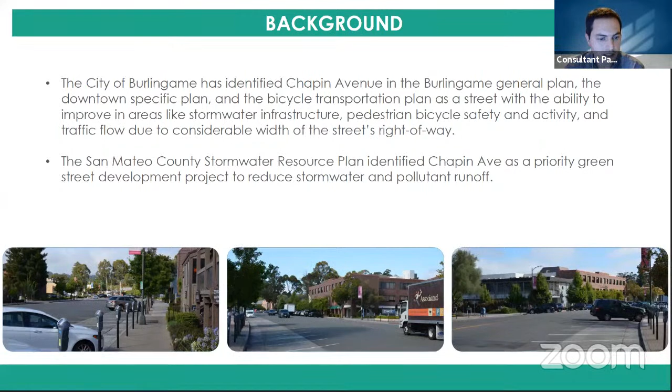After this meeting, we'll follow up with another presentation with City Council before finalizing our feasibility study with a hopefully supported alternative. Next slide, please.

So our goal for this meeting is to update you on the progress of the project since the last time we presented, as well as getting your feedback on the alternatives that we've developed since then. The key topics that have been a common theme throughout the public outreach stages of the project are green infrastructure, community spaces and village character, pedestrian access and safety, vehicular access and parking, and bicycle access and safety.

Next slide, please. So here's a bird's eye view of alternative 1. It features a planted median with street trees, bulb outs for bioretention and pedestrian crossings, a mid-block pedestrian crossing, class 3 shared bike lanes, an optional all-way stop at Primrose, and 78 total parking stalls.

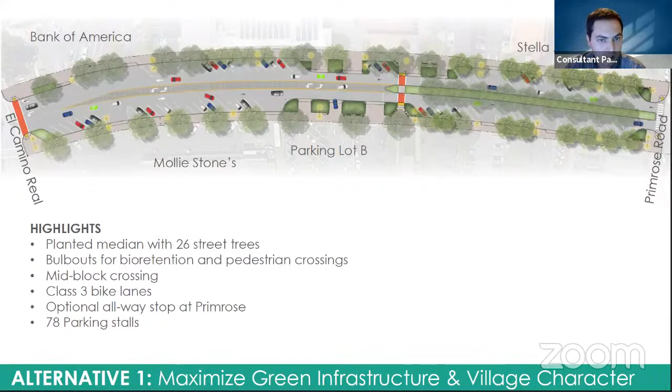And then we'll be able to get back to these bird's eye views later, so we can take a closer look. Okay, this is alternative 2, bird's eye view. It features a lot of the same things: street trees, bulb outs for bioretention and pedestrian crossings, a mid-block crossing, class 3 bike lanes, an optional all-way stop at Primrose, and 89 total parking stalls. The big difference here, as you can see closer to Primrose, is the parking median with the street trees.

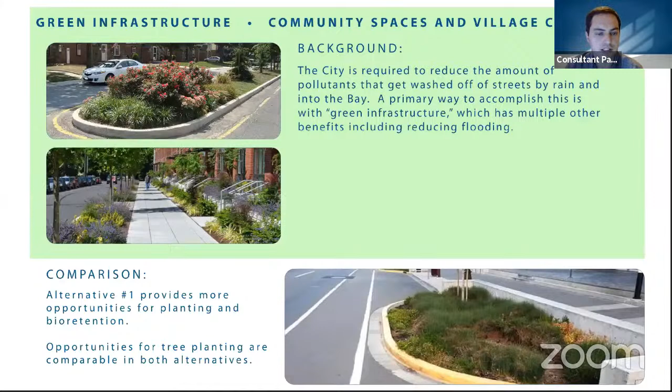Next slide, please. So one of the main goals of this project, regardless of the alternative that's chosen, is stormwater quality. By increasing the amount of landscaping and using green infrastructure like bioretention planters, we can help lessen the pollutants that wash off our streets and into the bay. Both alternatives provide added green spaces compared to the existing condition, but alternative 1 provides more total area. Tree plantings are also pretty comparable in both alternatives.

Next one, please. So here's a side-by-side comparison looking from the Primrose intersection. It shows the various aspects of the green infrastructure that I just talked about and community spaces that we've been discussing, and how they fit in with the street.

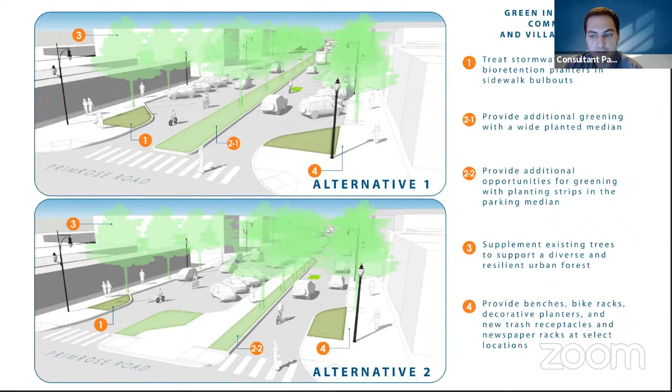Next one. Many of the residents that we discussed this project with envision Chapin as an extension of downtown, with a lot of potential for community spaces and pedestrian access. We also heard pretty often that pedestrian safety was a priority. So we included the bulb outs for pedestrian crossings, shortening them, including a mid-block crossing to limit jaywalking, and improved lighting to not only make pedestrians safer, but also make a better connection to Burlingame Avenue in character.

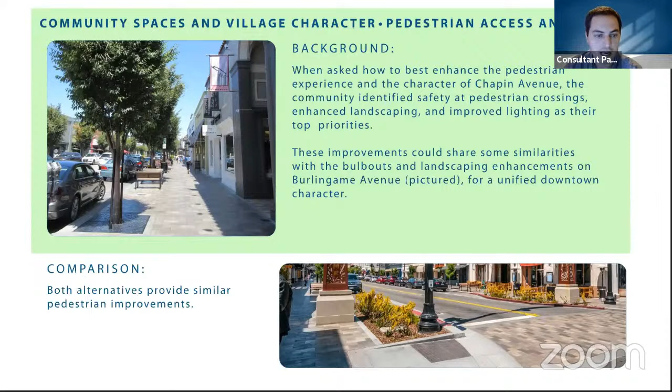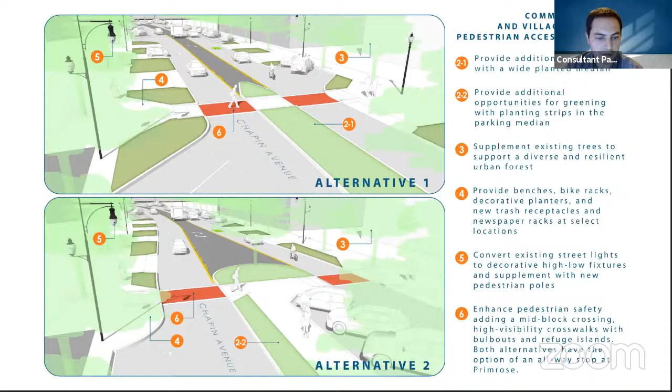Throughout our public outreach, parking has been probably the hottest topic that keeps coming up. Both options end up in a net loss of parking for reasons we'll show later, but alternative 2 aims to maximize the amount of parking we can get out of the street. We found most respondents were not using Chapin Avenue for biking, but because it's a dedicated bike route according to the city's plan, we're proposing to add class 3 bike lanes using sharrows on both alternatives.

Here's a side-by-side comparison from the opposite end, El Camino Real. We can see the nose-in angled parking, similar to what's there now, the shared bicycle route, and the center lane that will be used for turning movements as well as delivery loading for things like Molly Stones.

Now that we've gone over the individual aspects, we can take another look at the bird's eye view of each alternative and put those things together. We've got the shortened pedestrian crossings at the mid-block as well as at each intersection, increased green infrastructure with street trees as a common theme throughout with landscaping, and added community spaces.

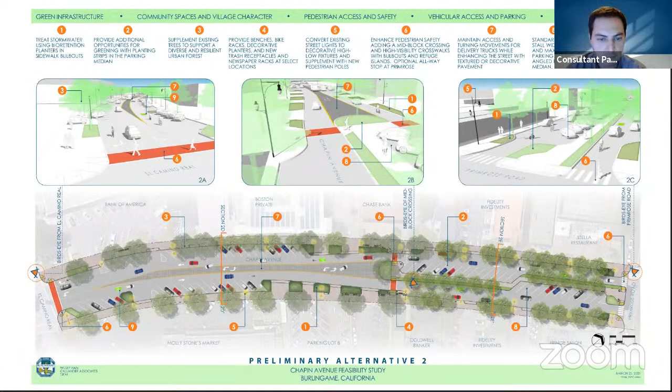Here you've got the cross sections again. I'd say the cross section at El Camino is identical, whereas to the right, closer to Primrose, you've got that parking median with pedestrian access, so you've got two sides of parking on the southbound lane of Chapin.

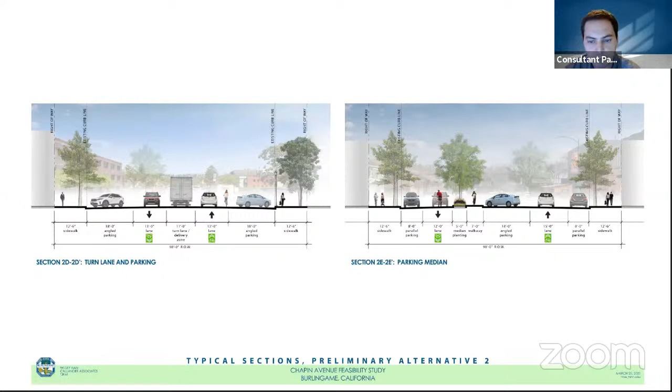Here you've got the parking impacts I was talking about earlier. The reason we're losing net parking counts in both alternatives is due to the non-standard orientations in the existing condition—you've got two different types of angled parking, which once we improve the street, we'll need to provide uniform stalls for. We're also trying to utilize some of the street width for other benefits like community spaces, medians, traffic calming measures, and green spaces.

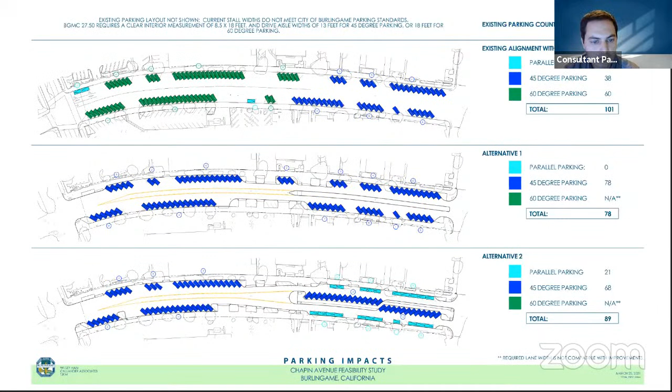Here we've got a similar comparison for green space. As you can see in the existing condition, the trees are more sparse and not necessarily themed or interconnected. In both proposed conditions, you've got the bioretention bulb-outs and the planted medians.

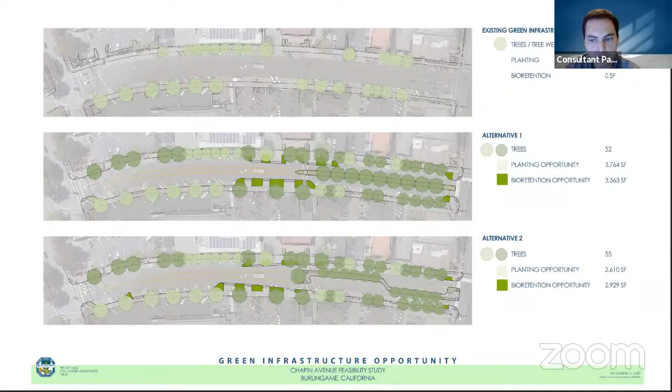Here we go with a summary table of what I've been discussing in the last two slides, comparing the existing conditions to both alternatives when it comes to parking as well as landscape areas.

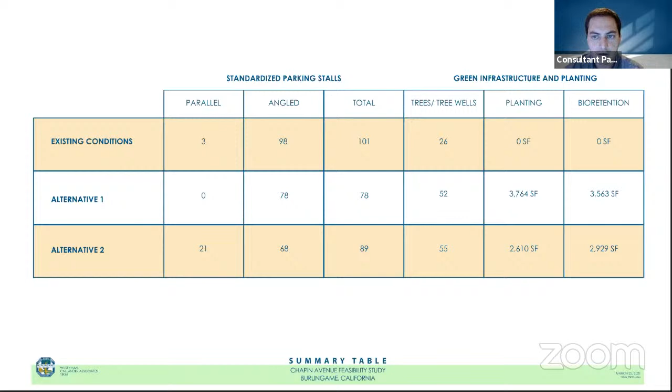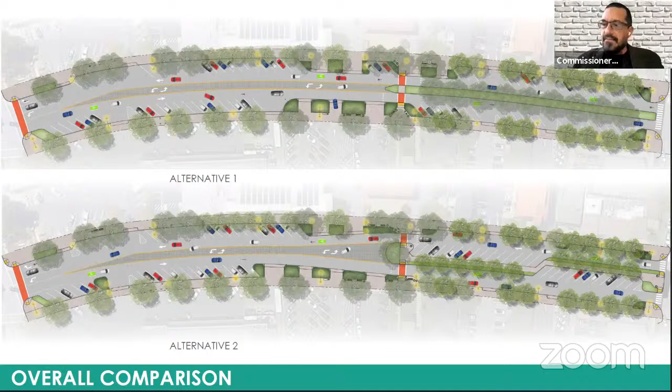Okay, great. Commissioner Lee, do you have any questions or comments? Yes, I do, thank you. How far is the crossing distance at El Camino and Chapin? How far do the pedestrians have to walk?

It looks like it's 4.5 lanes. Is that over 60 feet? That is 47-ish feet. Okay, I can live with that.

Thank you. My next question is on alternative 1. It appears that parked cars will be driving over the center mid-block crosswalk as they pull out. Is that correct, that they would be driving backward over the crosswalk? When they're backing up, yeah, currently they have probably just enough space to back up and not hit it. But you're right, that's something we'll have to look at when we get into actual design. It looks like both legs of the crosswalk would be invaded by drivers backing up onto the crosswalk in alternative 1.

Next question is over at Chapin and Primrose. Is that going to be a 3-way stop then? That's an option in both alternatives, yes, the option to add an all-way stop in each direction.

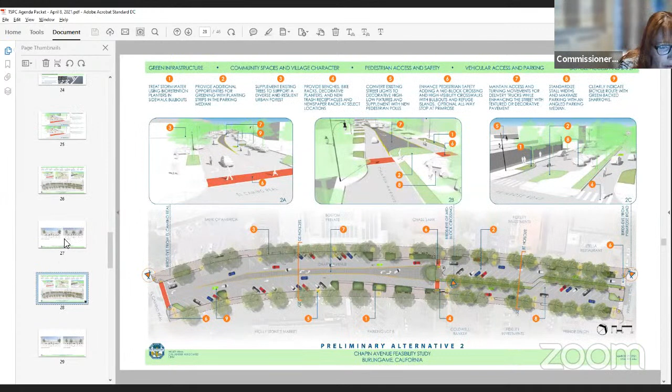All right, my last thing - I noticed when you showed the lighting, can we go back and show the street lights? I noticed that they were not in the position that is most helpful to the crosswalks. Can we go back to that slide possibly? Somewhere you showed street lights. Maybe it was like the street view. No, it was like the human scale view. Yeah, it'll be... all right, this one, there you go.

Yeah, so for example, I don't see a new street light here on the left side of the landing zone. And ditto on alternative 2. And then for pedestrians, that street light really ought to be way up there, closer to the crosswalk, so that pedestrians are lit up in the crosswalk at night. Same with alternative 2, just to take a lot more care of how the crosswalks are lit up.

And they need to focus the light on the front of the body of the pedestrian, not just overhead, because then the rest of you is dark. The body needs to be lit up. So for example, both alternatives, see the lower lamp on the right? Like you have the upper one for the motor vehicles, it appears - that lower one is the one that needs to be shining on the pedestrian's body, so you see their clothing lit up at night. And it's also far more comfortable for a pedestrian to have lower lighting. It's much cozier when you're walking at night to have down low lighting instead of up high.

So I would like more care on the lighting and where they are. I mean, this might have just been photoshopped in because it looks good, but there aren't lights, you know, like on that landing zone at El Camino. Clearly you need a street light there - I mean a pedestrian crossing light. Anyway, that's my questions. Would those be looked at more thoroughly, the lighting?

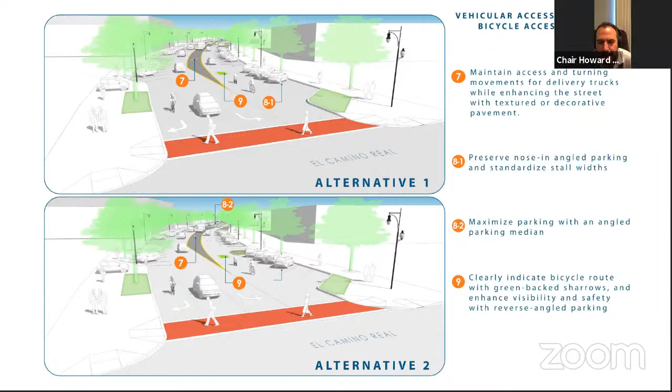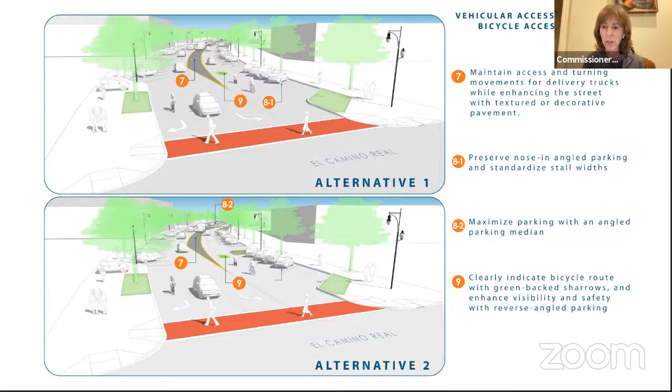I do. First of all, thank you for such a wonderful presentation. It's really made this easy to visualize both of these alternatives and compare them. I really appreciate the effort that went into this. I also would like to say that while I haven't given much thought to Chapin in the 13 years I've lived in Burlingame, it's because it's just so unremarkable and an open space. I think this is going to be a wonderful change and a great addition, especially because of the ecologic reasons.

Looking at the two designs, I have to agree with the general population. I definitely prefer alternative 1 for several reasons. One is, right now Chapin is kind of a wasteland, kind of ugly, kind of industrial. And the amount of green space, both planted and trees that you showed, is at least 20% more with alternative 1.

So not only is it data-driven with a larger amount of space, but also from a visual standpoint, having one big long block going down the second half of the street is a much more valuable way to have your green space than to have little slivers of it cutting around the different areas of the median and angled parking, in my opinion. Plus some of that then needs a sidewalk because people are exiting in the middle of the street, so that where we could only have pure green space in alternative 1, you need to take some of that away to have a sidewalk running that entire length in alternative 2.

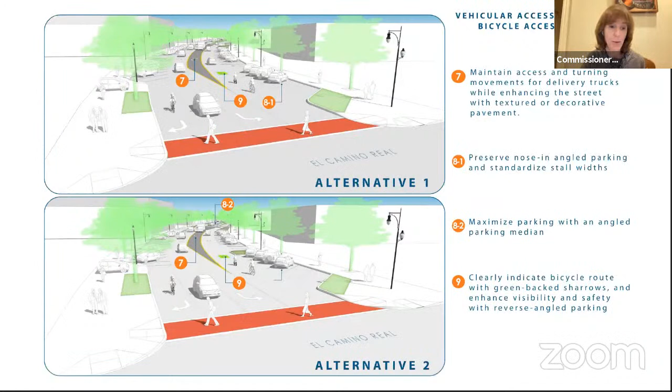But thank you, I'm excited about this project now. Great, thanks so much for your feedback.

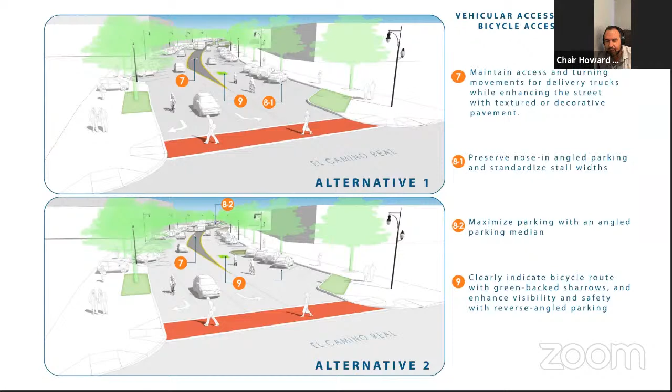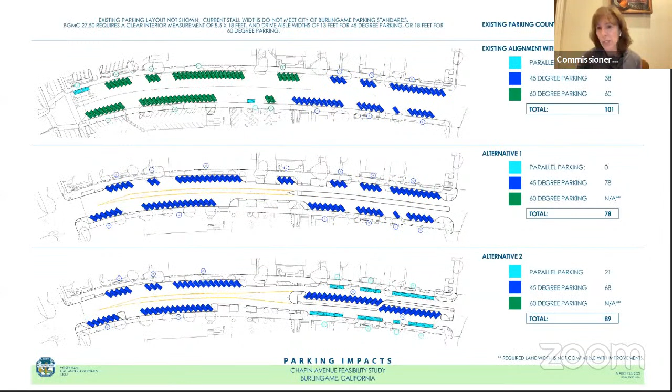Commissioner Israelit, I hate to jump in because I'm going to go to Commissioner Martos very soon, but you said something about sparing 11 or 12 parking spaces—I just want to clarify, alternative 1 actually takes out significantly more parking spaces than that, right? We lose 11 or 12 in alternative 2, but alternative 1 we lose, I think, 22, right? I was just comparing alternative 1 to alternative 2—there's a difference of 11 spots. We're going to lose parking spots with either, I'm just comparing 1 to 2. Got it, okay, I just wanted to clarify, make sure we were all on the same page on the numbers.

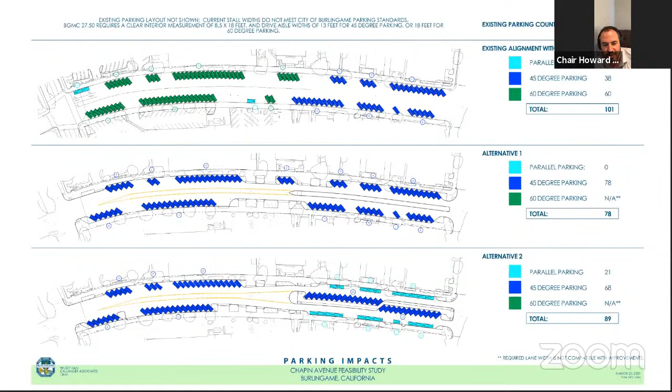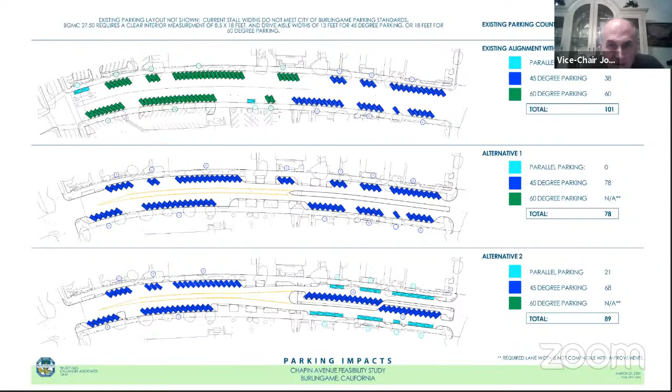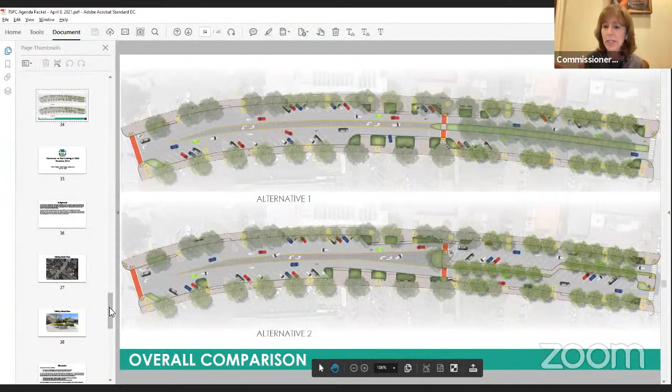I had some questions. So I was wondering about the median—can you go to the image that shows the merchants that will be affected by that median? Right now there's no median, and people can turn left into, let's see, I can't see the names of the merchants there. I think I saw Fidelity and maybe Coldwell Banker. Go to the next slide. I think there's two real estate agencies there. There was one of the slides that had the names of the merchants on it.

So I was wondering, there are going to be some merchants affected by no left turn because the median is there in both alternatives. I was wondering what their feedback was—you said you got feedback from the community as well as the merchants. Do you recall what their feedback was, if they had any concerns? Yeah, you're right, actually. We did do a presentation at DBID earlier in the process. I don't recall getting feedback specifically about what you're asking—a lot of their feedback was about parking specifically. Okay, so their bigger concern was with parking. Yes.

So I guess it doesn't matter who the merchants are if, as a group, they didn't have any concerns about the no left turn into their driveways. I was wondering how far, well, I guess how far doesn't matter, but I could see people traveling west wanting to get to a business on the east side, making a U-turn after the crosswalk. So will that be no U-turn there, or will U-turns be allowed at that point?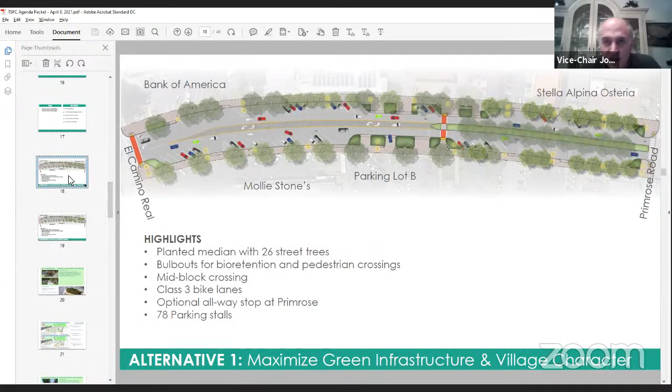So then can you flip the chart back to alternative 1? Okay, and then go back to alternative 2. That's what I thought. So what I would do if I'm traveling westbound on Chapin and I want to get to my Fidelity office on the south side of that street, is I would park in one of those stalls in the median, and then I would jaywalk right across the street to Fidelity.

Now, so that I'm not jaywalking, was it considered to possibly put another crosswalk mid-block where that zigzag is, so that someone can get to the other side safely in a crosswalk? Did the consultants, Mr. Parker, did you consider that?

We did not. I guess one thing I would add is the volume of driveways in that location may make it difficult to fit a crosswalk in, but we felt that the feedback was to put a mid-block crossing, so we put it at the mid-block, so that it might get used by more people in total.

I understand that, but I'm saying right at that zigzag is where the Fidelity office is, and I'm headed westbound on Chapin and I want to get to my Fidelity office. There's nowhere on that street for me to make a U-turn. So what I would do is park in one of those angled slots right at that zigzag, and I'd walk across the street. It'd be safer if I walked through a crosswalk across the street.

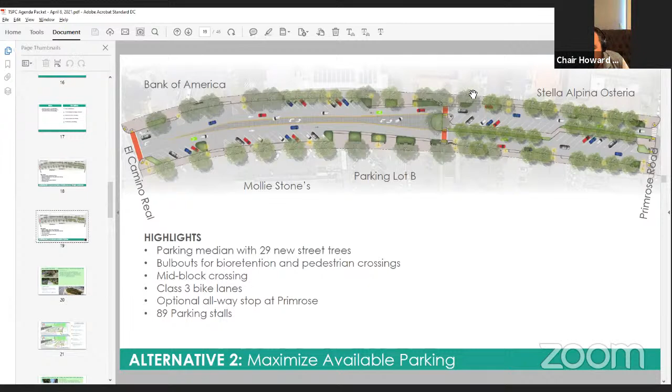Is that Chase? Yes. Okay, so someone going to Chase couldn't enter the Chase parking lot coming from El Camino. Do I understand that correctly? Yeah, I don't know if you can see. Oh sorry, this is blocking. The driveway is right here.

Right, yeah. So if I'm going to, the reason I'm pointing that out is Chase, like some of these businesses, have parking for their customers. If the customer can't get there, you're neutralizing, and now you're putting more cars on Chapin, right? So if I'm going to Chase, maybe I'm planning ahead and I'm going up Burlingame Avenue and making a left on Primrose, and driving around the downtown now rather than going up Chapin to get to Chase.

I'm doing a circular route, adding to the downtown traffic because I want to be able to park in the Chase lot. Or just as likely, I'm not thinking ahead, and I realize I can't get to the Chase lot, and now I'm parking on the street on Chapin, whereas I wouldn't have otherwise. And now maybe I'm crossing Chapin, whereas I wouldn't have otherwise. And those spots that Chase offers up for its customers are now not being utilized and being shifted onto Chapin. So I find that kind of troubling because I think it might exacerbate circling and pedestrian issues even further.

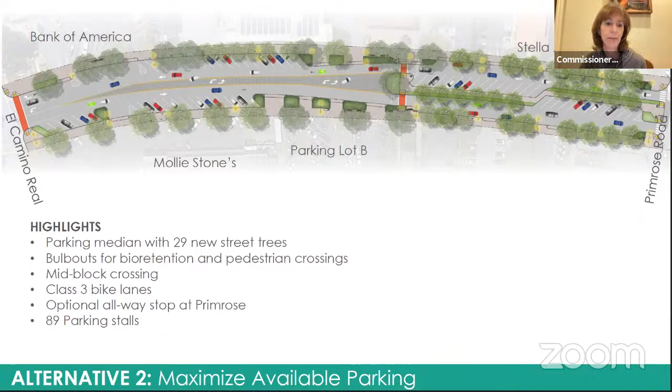Okay, Vice Chair Martos, you had your hand up. Yeah, let me lower my hand. Here we go. All right, I'm unmuted.

I wanted to go back on the potential of adding a crosswalk at that zigzag. Commissioner Lee brought up a good point: as you back out of that spot, if there's a crosswalk right at the zigzag on the south side of the street, and another at the entrance to the zigzag on the north side, people backing out would back into the crosswalks. So if you consider my proposal, if you change the zigzag the other way, then when people back out of the spots, they won't be backing into the crosswalk. That was the only thing I wanted to add, and that would facilitate people parking at that median and walking across the street without backing into a crosswalk.

Mr. King, what I just described, or Mr. Parker? Yes, absolutely. Okay, thank you. Good.

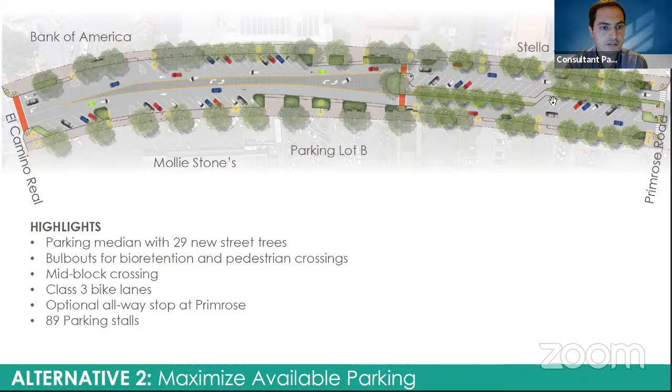Option 2 does have some traffic calming measures that option 1 doesn't, one being that you have a slight change in direction where you're widening from the El Camino direction to Primrose, which tends to slow cars down a little bit. So that is an added benefit, I'll agree with that. But in general and in theory, the traffic calming should be identical in both options, and that's what we were aiming for. That's all I've got.

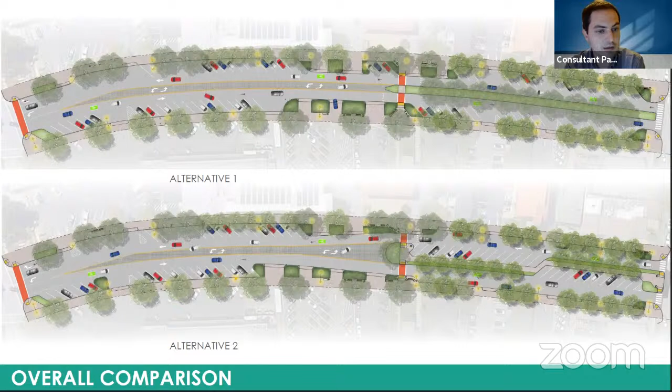Stop signs. Oh, the stop sign, yes. So there was a warrant analysis done on the intersection. It did not meet warrant, so it's not a required improvement, but the traffic consultant still recommended that it be installed for traffic safety and calming measures. So at this point it's simply an option in both alternatives, not required, and obviously no decision has been made on that. It was just something that came up a number of times in the public outreach, so we decided to study it with our traffic consultant.

Sure, and I think the last comment was just to ensure that when the bulb outs are designed, that they're checked with truck turning radii to make sure that the design truck can easily make it through that intersection. So that's a very good point.

Okay. Through the chair. Yep, Mr. Wong. Sorry, and I'll leave this at your discretion. Ms. Frechette had her hand up again, but I'll leave it to you if you want to. Yeah, generally I resist 2 bites at the apple, but Ms. Frechette, go ahead.

Yeah, I just wanted to thank the consultant for the technical clarification there. My point was more about the design of the median, and alternative 2 appears much wider, and therefore drivers are probably going to feel less likely to step on the gas, especially at the crossings where the bulb outs are larger. Thank you. Okay, thank you, Ms. Frechette.

So yeah, I'll close. I'll just say, listen, I guess I'm a pearl clutcher. I do envision a future for our city where we have less parking in the downtown. I think we are looking to do a significant reduction when we create a town square in Lot J. And what I really hope we don't do is, while that is coming up, we snip parking all around the perimeter to the point where when it finally comes time to do the town square in Lot J, we feel like we can't spare it. We can't spare the parking. I want to make sure we are able to spare the parking in Lot J.

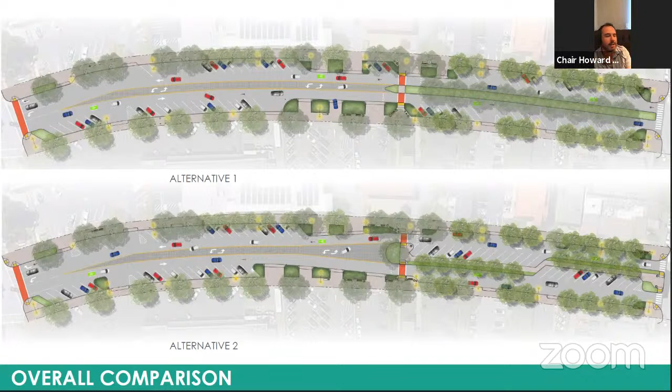Okay, we can proceed to item 6C in regards to the red curbing on Devereux.

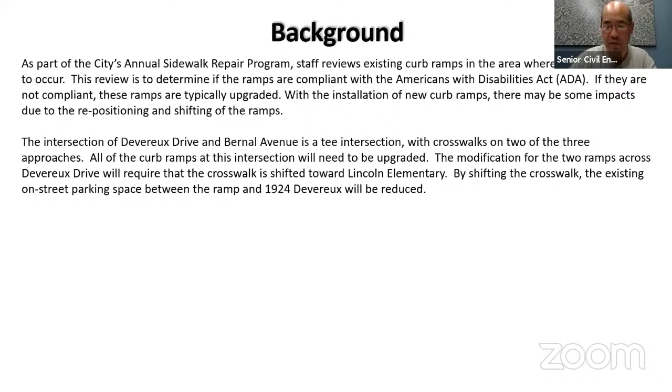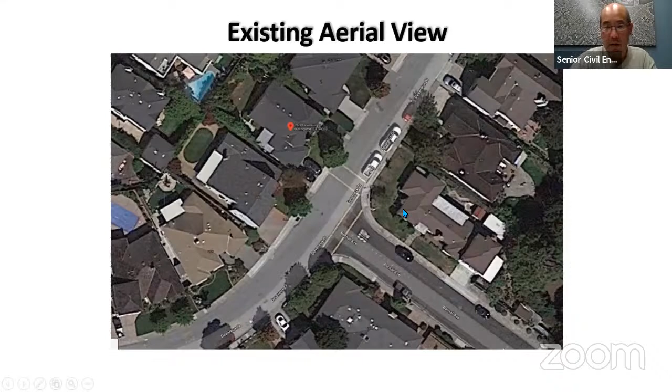So first off, here is, just for your reference, this is 1924 Devereux. We have three ramps here: one on the southwest corner, southeast corner, and the northeast corner. Here is 1924 Devereux, and here's that crosswalk coming across. Approximately between the curb ramp and the driveway is 28 feet—sorry, having some technical difficulties, let me get you back to that. We've got 25 feet currently right there. Sorry, apologize, I'm working on two computers right now.

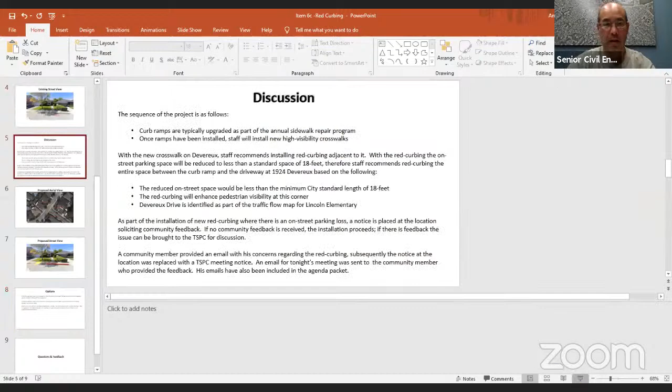So what we're trying to do is install the ramps as part of the annual sidewalk project. Once the ramps are installed, we would improve those crosswalks to high visibility crosswalks.

For the new crosswalk, what we recommend is red curbing the entire space. With the reduction of space because of the crosswalk shift, the red curbing we'd put there to improve pedestrian visibility at that crosswalk, because it looks almost like a mid-block crossing, would reduce that space close to 18 feet. That means a car parking there would park right up against the crosswalk, even with a 2 or 3 foot buffer.

We also want to point out that Devereux, as part of Lincoln's route to school, is marked that way. The traffic flow shows vehicles and pedestrians going down Devereux.

As part of this, when we were reviewing it, we made contact with the resident who might be impacted with the loss of space. He indicated he had some concerns with that. So we immediately placed a notice there, also indicating if there was any other feedback from the community regarding a red space. We received feedback again from the resident, and then we decided we'd put this on the agenda for tonight's meeting, and placed a meeting notice out there.

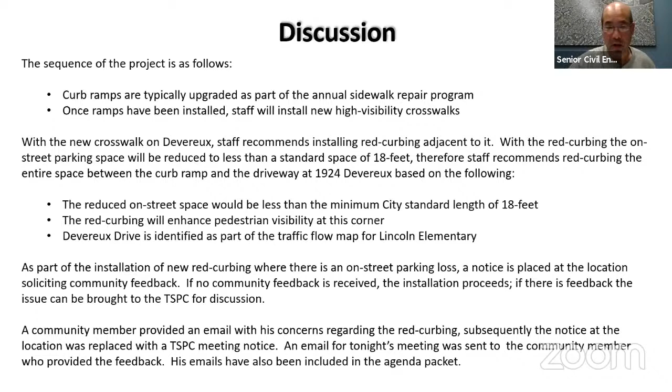So the options we have are to red curb that entire space, which staff recommends, and install the upgraded crosswalks and curb ramps. Other potential options are to upgrade the crosswalk and curb ramps and reduce the amount of red curbing, leaving a space close to 18 feet, which is our minimum parking space length for on-street parking. Or the commission could entirely remove the crosswalk and ramp there at Devereux.

Again, if you move forward with this action, we would have to do a notice to allow for public feedback per the vehicle code that directs us how to remove a crosswalk.

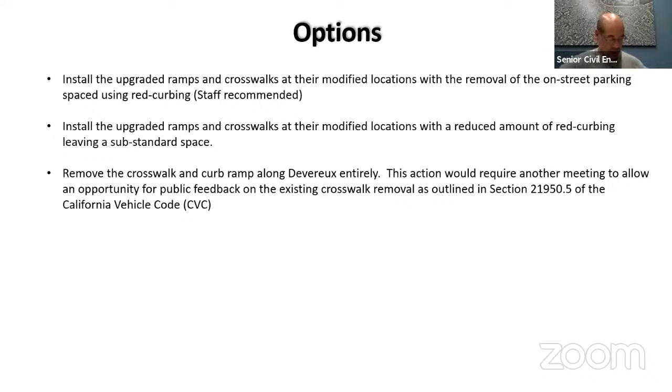So what I'd also like to point out, the resident is listening tonight, he's on here, but I'd like to point out he had concerns with the removed parking space, obviously causing some parking inconvenience for those who use it. Another note he made was impacting property values. He did propose a couple options that we may do.

The other comment the resident had was to potentially put an RRFB here. That's potentially a case, but we haven't done an RRFB directly in a residential neighborhood. I believe the closest one we have is the one on Carolan, but that's between the tracks and usually on the side of homes, not right in front of homes.

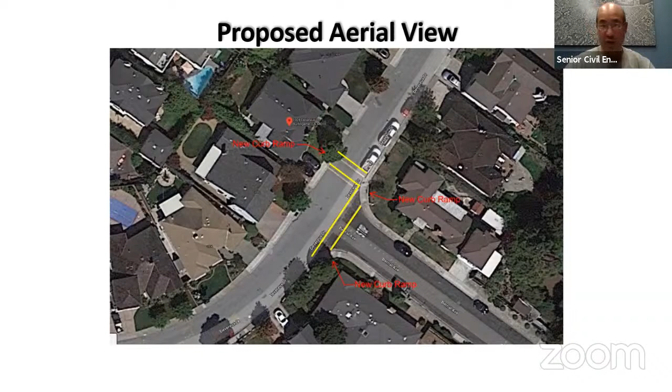Well, why don't we go to public comment first, and then I'll start running through the commissioners' questions and comments. So is there any public comment on this?

Sorry, trying to find out what happened to my screen. Let me bring him in.

Mr. Mike Liu. And if he has any public comment, you're able to speak, Mr. Liu, if you wish to. Okay.

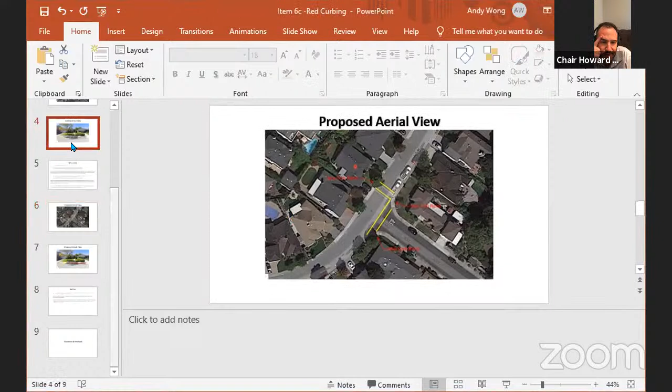I guess I would just want to ask the question. Could a car fit in that space? Could you give the street level view if possible? I think it's in slide 4. Yeah, I don't know if you can make that your whole screen so we can see it better.

I guess the question I have is, would it be possible? So it's 25 feet now. You're saying once the crosswalk's moved over, you're down to 18 feet. I would note that there's probably another foot there that doesn't really block the next door neighbor's driveway.

Have we gotten any comments, by the way, from the person who lives at 1920 Devereux? 1924 Devereux. We have not. Well, 1924 is the person whose comment, or 1920 where Mr. Liu lives. 1924 is here. I got it. They have frontage in front of theirs on the other side of the driveway for parking.

So right, but have they been solicited for comments? We placed an A-frame out there with a notice indicating both the red curbing and the meeting. Okay.

So I guess my point is, if you look at the frontage down the street, there probably is at least another foot there before you've got a bush that pushes into that driveway where no one would be driving. You probably have another foot there. So I guess my question is, are we sure there is room for a car there, right?

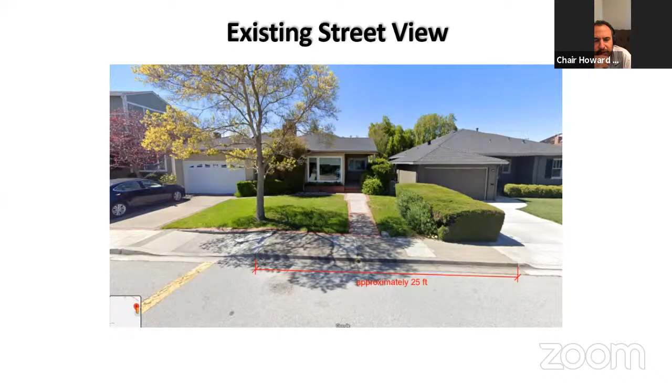And that's 18 feet, the part that's the red curb that you're showing. It's roughly that. Okay. And that's the minimum amount of footage you could give a car. In other words, you couldn't leave like 2 feet of red curb there and then leave a space. That wouldn't be enough. It would probably be less than that.

And the concern is obviously you've seen it anywhere you've parked. You see a compact space, and how often have you seen a vehicle that's not necessarily compact parked there? And that's the dilemma we face. Right.

Through the chair, something we can look at, because as staff we've driven down the street, but haven't driven it as parents. We can take a look at the additional volume - this is a residential area, probably low volumes. My guess, it wouldn't meet volume warrants. However, based on the school warrant, as well as visibility, we'll take a look at that curve, if there's an opportunity for an all-way stop. It's something we can consider, but we'll have to look at it and try engineering judgment. That's probably the only way. My guess is it's not going to meet traffic warrants, and we'll look at the collisions.

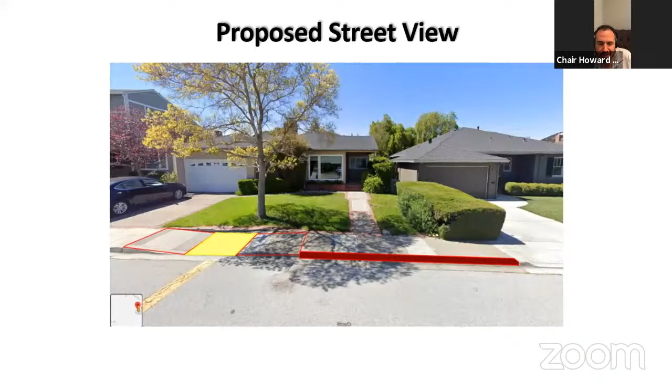I appreciate the thinking, but I approached it from all three directions today, gave it a try. What I noticed when I approached it from coming from Lincoln is it's a very narrow road, even without a car parked there.

And I think if it was a wider road, the idea of maybe having a smaller parking space there with a stop sign might be a little more possible. But I feel there's two things that, especially with the larger SUVs, a car parked that close would also block the stop sign, perhaps block you from being able to see it.

But if there's a car parked there's only one lane to drive through there for both directions. So how does that work with a three-way stop? If someone is arriving at all three sides at the same time and they all want to proceed through Devereux, I don't know how they're going to work that out.

Well, I mean, it's probably the way it gets worked out all around Easton Addition every day, up every road, which is people have to kind of look at each other and wave, be courteous. But I think it's a good point. I don't mean to diminish your point, and I'm interrupting, so please go ahead, I appreciate it.